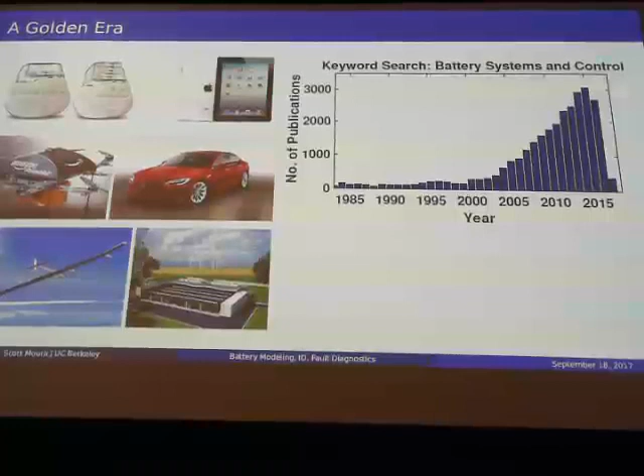And then something changed right around 2004, where there was the first paper that described how to do state estimation for batteries, specifically using extended Kalman filters. Actually, it was a triplet of papers by Greg Plett out of the University of Colorado. And ever since he started that, this field has absolutely exploded. And you can see that from the data. Of course, the numbers aren't fully in from these last years, which is why you see that dip. It's expected that it'll continue to rise. So it's a rapidly growing field.

Now, of particular interest in managing this particular system are failures. So this is something that we definitely want to understand well, and we would like to mitigate against. So one of the famous examples is the Boeing 787 Dreamliner. You're all probably familiar with the fact that a number of those planes were grounded due to battery fires that emerged. Actually, one of our PhD students who has now graduated worked at Boeing during that period.

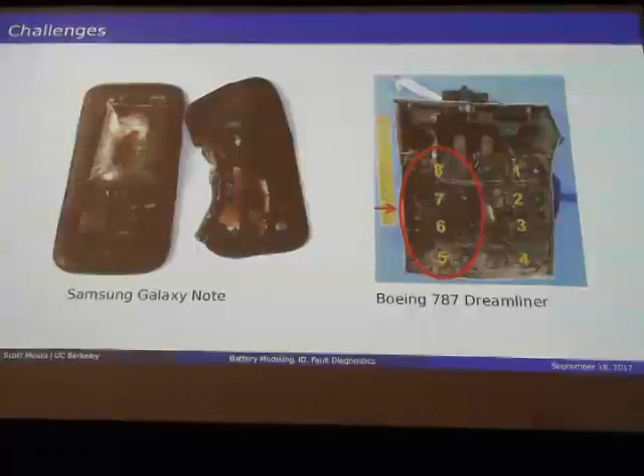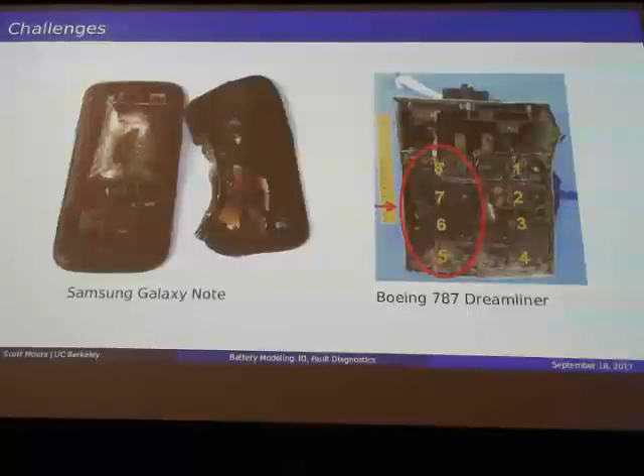And if you flew in an airplane in calendar year 2016, then I'm sure you've heard the fact that you cannot have a Samsung Galaxy Note in your pocket or on board. So it turns out that a lot of these disasters could have been mitigated with some sort of form of fault diagnostics. And as it turns out, what was used in these industries was extraordinarily primitive. So we're interested in how could we build a science in mitigating these sorts of disasters in a battery context.

Okay, so let me first highlight just the general battery problem. So I'm just going to give some background on battery management systems and batteries in general. So we want them to be cheap. We want them to have high energy and power density. We want to charge them fast, and we want them to live a long time. The reality is that they're way more expensive than we'd like. They're conservatively designed and operated because we don't fully understand how they work. And they die quicker than we'd like.

So here's some motivating facts around batteries as energy storage systems. So if you think about batteries used for electrified transportation, the cost of batteries has been increasingly coming down. So in 2010, it was something like $1,000 per kilowatt hour. Today, the last numbers I heard were dipping below $200 per kilowatt hour, maybe down to $150, depending on what context you're talking about.

It turns out that if you're interested in electrifying transportation, the magic number to get at is $125 per kilowatt hour. This is the number for which the battery and the electric motors are on economic parity with an internal combustion engine, the IC engine. So at that point, economically, it doesn't make sense to combust fuels for transportation.

The problem with batteries, among many, is that because we don't fully understand how they operate, we're conservative with how we use them. We may use, in practical applications, only 50 to 80% of their true available capacity. Another related aspect is, of course, this limits range. It causes range anxiety in the context of electrified vehicles. And then there's lifetime risks caused by fast charging, which could lead to things like the fires that we saw on the previous slide.

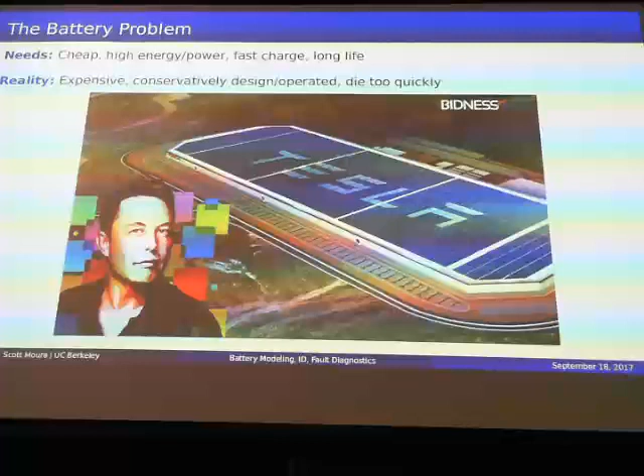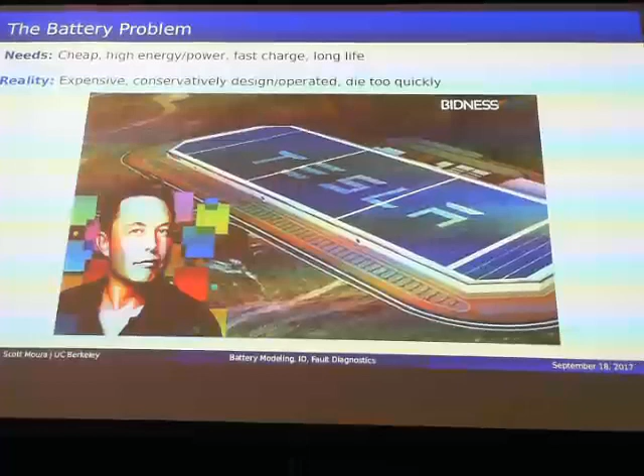Now, part of that comes from manufacturing, right? As we grow the supply chains in this, we can decrease costs. So, for example, you have this famous individual who is creating the largest manufacturing plant in the U.S. by square footage, and that'll certainly help to bring manufacturing to bear on this problem. But there's a lot more we can do in terms of science and engineering.

So I like to say that there's really two solutions to helping achieve these goals. One is to design better batteries, and one is to make current batteries better. Right? So a little play on words. What I mean by that is designing a better battery is really a question of material science and chemistry. Finding that next new chemistry that has greater energy storage density, greater power density, so on and so forth. Incredibly important work. We are not in competition with that. In fact, we support it and enable it.

But the other side of it, which is often not given as much credit, I think, is making current and future batteries better, which is really a question of the automation, the controls. How do we ensure that we can maximize the performance and safety of these devices? So that's the area we work on.

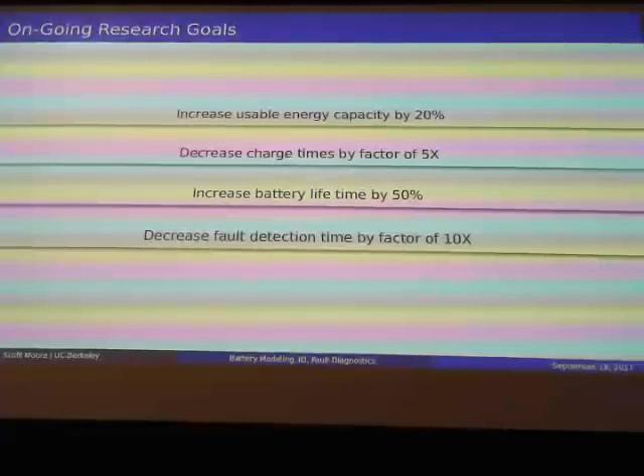And the ongoing research goals in our lab are the following. So, I tell my students they can't graduate until they hit these metrics. Okay. So things like increase usable energy capacity by 20%, decrease charge times by a factor of 5, increase battery lifetime by 50%, and decrease fault detection time by a factor of 10. So I'll eventually, in the last part of my talk, get to this last point of how we're able to accomplish that. Okay, so first let me give some background on batteries.

And some fundamentals of electrochemistry, so we can understand this electrochemical process. So, history. Let me bring you to the 18th century and the north of Italy, where we find Luigi Galvani. Luigi Galvani is a physicist and a biologist, and he did this now famous experiment where he took a dead frog, connected it, and found that the moment when he connected these two frog legs to these two basically alligator clips, the frog would jump to life.

So at that time, he found this incredibly interesting. Why was it jumping to life when he connected the frog legs to this metal? So he theorized that there was something that he called animal electricity. There was some internal energy source in this deceased animal, right? And that it would come to life when he connected the metal to it. And so, like academics and also like Italians, they like to feud with each other as they sort of debate on ideas.

He eventually presents this idea in front of Alessandro Volta, who sees this and says, I don't think it has anything to do with the animal physiology. I think it actually has to do with the fact that he's connecting two dissimilar metals in a particular way. So Alessandro Volta, to test his idea, comes up with what is known as a voltaic pile, where he takes zinc and copper, and between them he puts this electrical insulator, but it allows ions to pass through it. And voila, he created the first battery. He was able to measure voltage across these two metals.

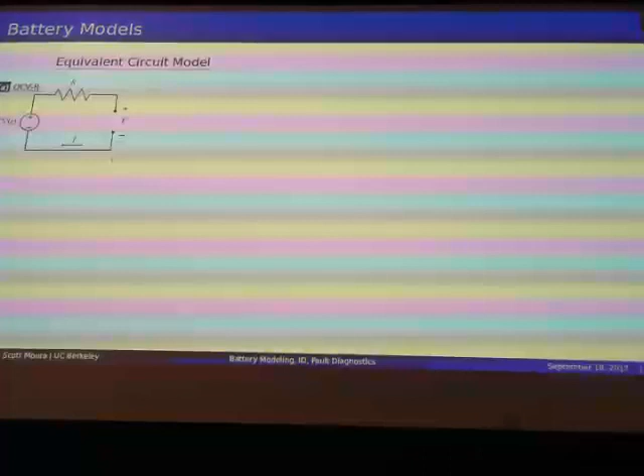Now, if you crack open those batteries, please don't do it right now, we're going to create a mess. No, you can play with them, just don't break them open. Right? They are not composed of resistors and voltage sources. They are electrochemical systems. Nonetheless, the people who do battery management systems think about them in this way, and you can get progressively more complex circuits that kind of incorporate more of the dynamical behavior.

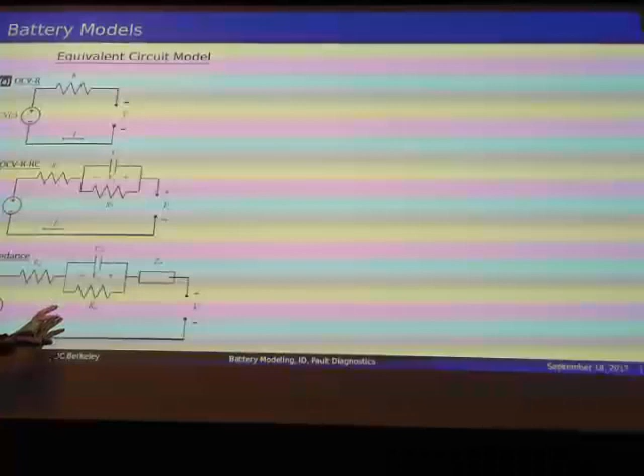Frankly, I think the reason that the industry is attracted to this is because the engineers that are responsible for making these battery management systems are electrical engineers, and they're comfortable with thinking about things as circuits, right? And less so thinking about them as electrochemical systems. Those people are designing the materials, not the battery management systems. So here's where our lab comes in and says, no, because we're really concerned about getting high performance and safety, we want to explicitly model the electrochemical, thermal, mechanical phenomena that occur inside these batteries.

So let me walk through roughly how a battery works. Okay, if I borrow one of those? Sure. So if you take this cell and you take a pipe cutter, for example, please do this in an argon glove box, and cut this open, then what you'll find is that it's actually composed of these sheets that are all wound up in what is commonly referred to as a jelly roll.

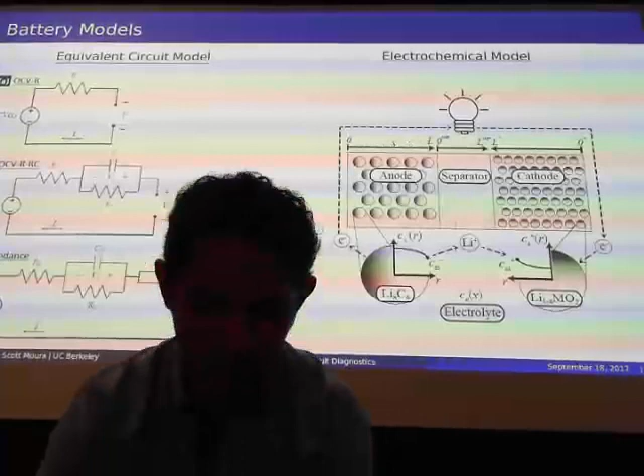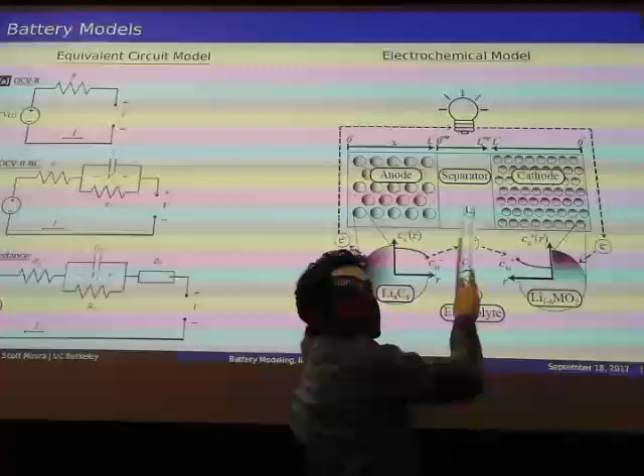And then they put it in this aluminum can here. Okay? Now, 3 of these sheets are respectively the anode, separator, and cathode. So the drawing here is a cross-section through these 3 sheets. Right? So the anode and the cathode are essentially two metals that are dissimilar. And they're dissimilar in a very specific way.

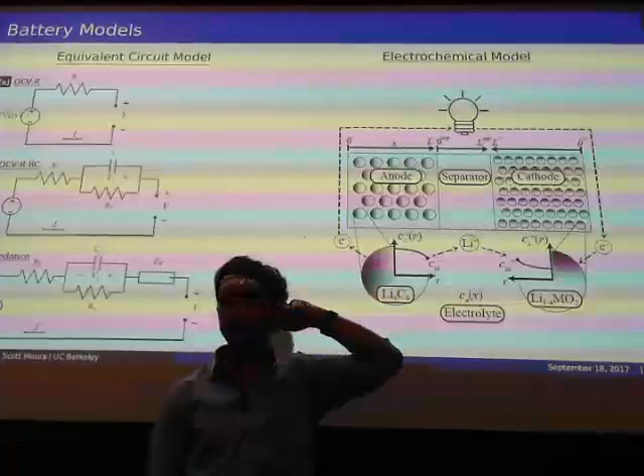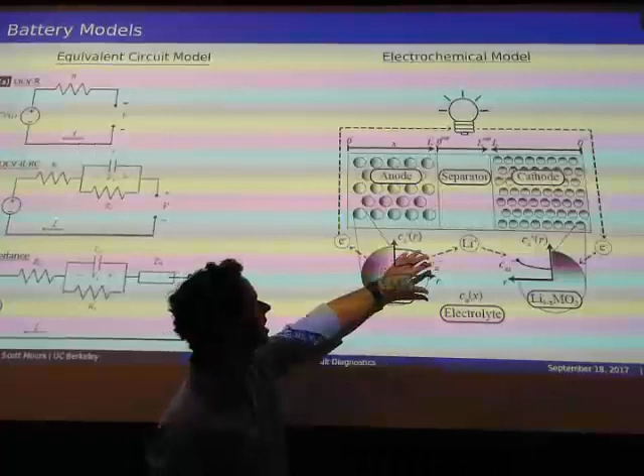They're dissimilar such that as lithium ions flow from the anode to the cathode, there's a release of Gibbs free energy. And specifically, when the battery is fully charged, lithium will be diffused in the interior of these particles that make up the structure of the anode material. And when you discharge the battery, the lithium ion will diffuse from the interior of these particles to the surface, undergo an electrochemical reaction where it splits from Li to Li+ and an electron.

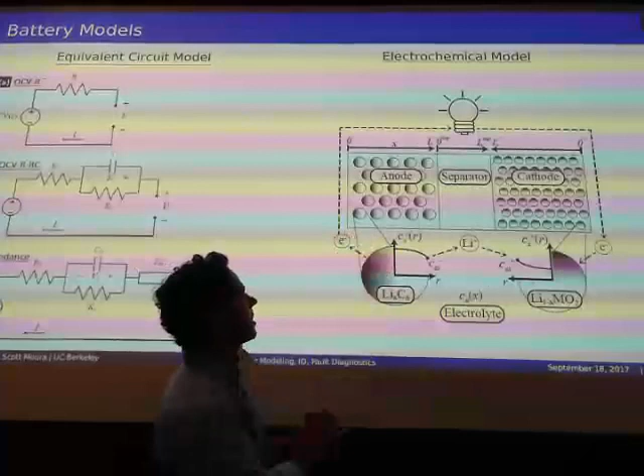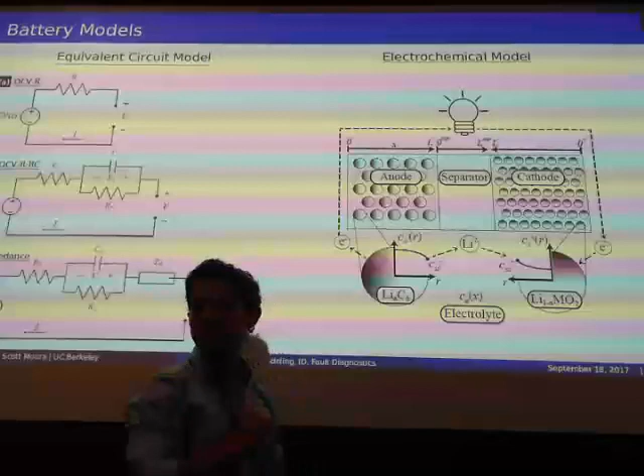Very simple. The lithium ion is now in this electrolyte, which you can think of as like a soup, a liquid, if you wish. And it transports from the anode through the separator to the cathode. Because the separator is electrically insulating, the electron is not allowed to pass with it. It is forced to go through this external circuit to power your device, drawn schematically by that light bulb.

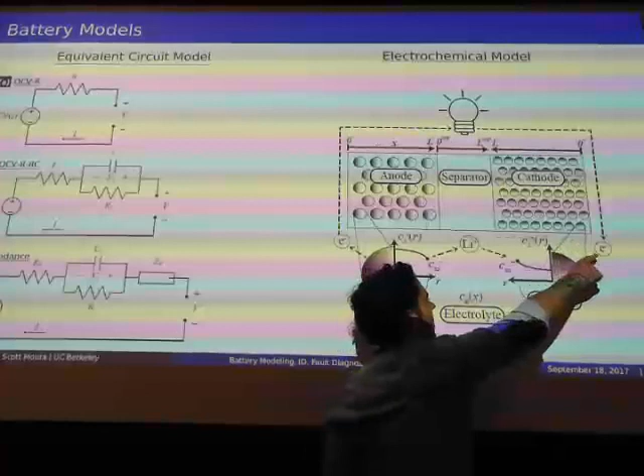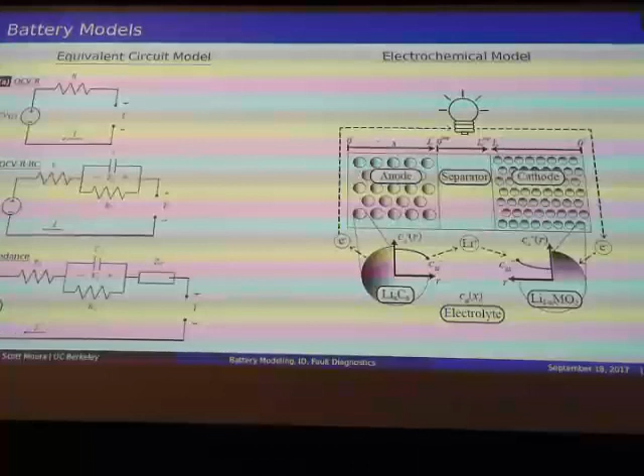It meets back up with the lithium ion here, undergoes the reverse electrochemical reaction, and diffuses into the interior of this particle. That is the basic phenomena that occurs in a battery. So we would like to track that behavior amongst other things. Now, why do we care? We care because we want to move from the paradigm on the left to the paradigm on the right.

Namely, the way we think and operate batteries right now is simply putting limits on what we can measure. So I can measure electrical current, I can measure voltage, maybe I can measure temperature on the cell. I'm going to put upper and lower limits on those, and that's my operating envelope. But in reality, if I actually understand some of the internal variables, which I can't directly place the sensor on, those things relate more to the fundamental limits of the battery.

That's one case. So really it's about, if I can understand what's happening internally, I can have higher performance and guaranteed safety. That's the point. So then the game is, how do I understand what's going on inside? So for that, I need mathematical models. Now, if I have good mathematical models, then I can come up with what we call an electrochemical controller. So this is automation of my battery cell.

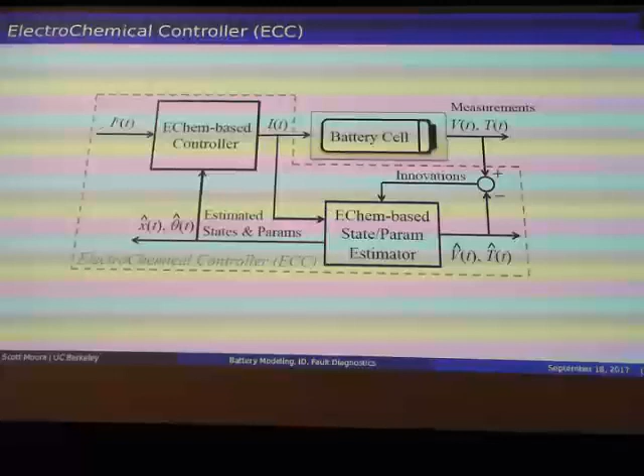And this mathematical model that I'm going to present was actually first developed here at UC Berkeley by John Newman, who is still a professor in chemical engineering. I guess he's a professor at the graduate school, as they say.

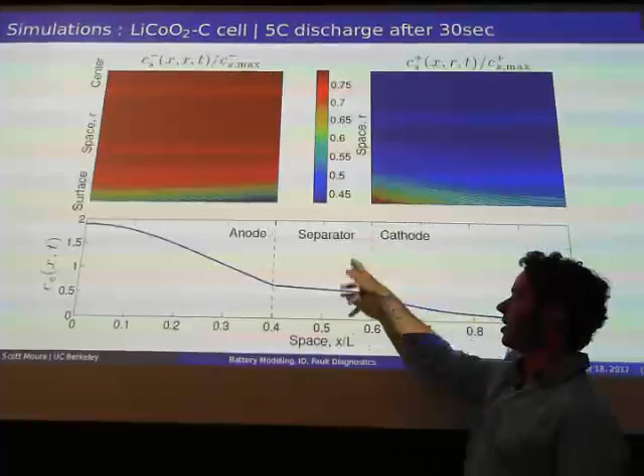So I've arranged this figure so the anode is on your left and the cathode is on your right. The separator is in the middle. On the top, we have the concentration of lithium in the solid phase, and on the bottom, we have the concentration of lithium in the electrolyte phase. So here's what's going on. On the top, we have two dimensions. We have this x dimension, which is how lithium varies along the thickness of these sheets. And then we have the concentration along this radial dimension r. That's the concentration of lithium as it goes along the radial dimension of these spherical particles.

Okay. So what you can see here is that there's higher concentration in the center and then lower concentration at the surface as lithium leaves these particles, and then it enters into the electrolyte, undergoes diffusion and transport to get to the cathode here. And then you can see here that there's a higher concentration at the surface, particularly at the separator cathode interface, and then it gets lower as you go towards the center there.

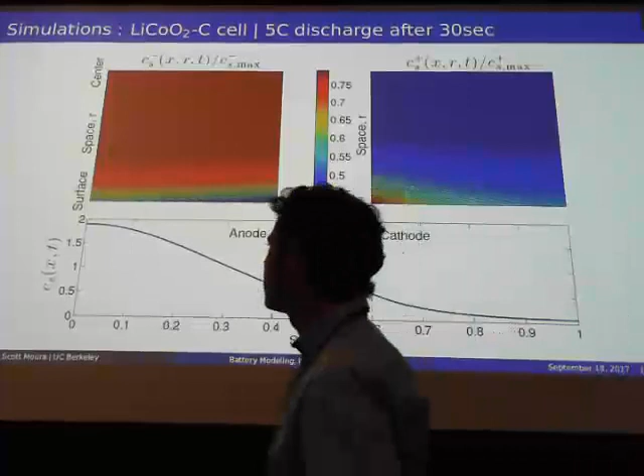Okay, so that's the mathematical model. So far this is all kind of theoretical. We would like to match our mathematical model to the batteries that are being passed around here. So this is the model identification problem. So here's the objective. I would like to identify the parameters of my mathematical model from experiments. So specifically, given measurements of electric current, voltage, and temperature, I would like to identify uncertain or unknown parameters.

Now there's two main challenges here. The first is, how would I design my experiments? How do I excite my process so I can easily identify these parameters? Very interesting question. It's an optimal experimental design problem. The second question, and probably the slightly easier one, is once I've collected that data, then how do I optimally fit my parameters to that data? Okay. So this is what I want to discuss with you next.

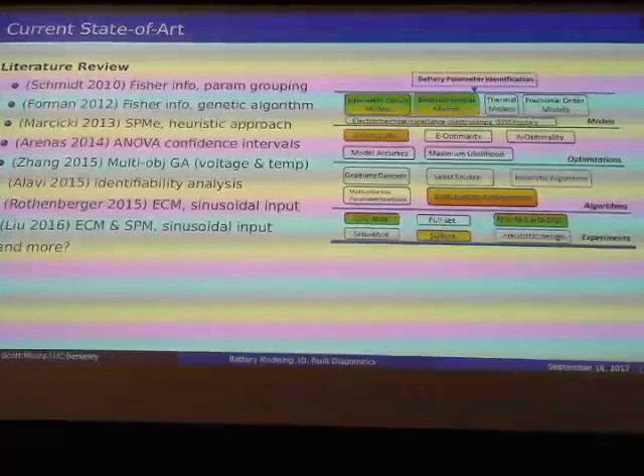I imagine you guys have situations where you have a physical process and you would like to identify a model from data. So, we spent a long time reviewing the literature on this. This is the specific literature for batteries. And we spent time thinking about what are the models they use, what sort of optimization, what sort of algorithms, experiments, and so on.

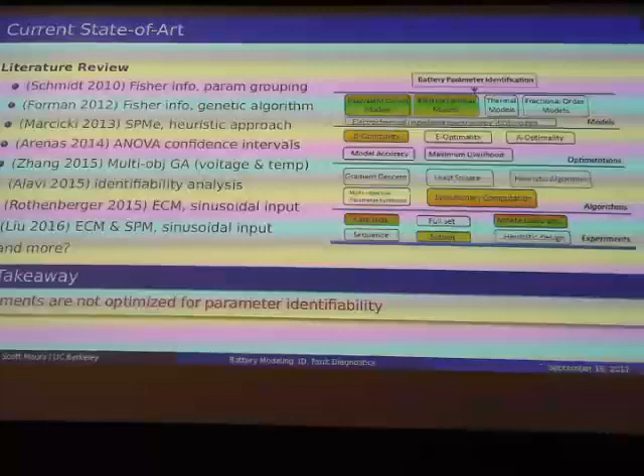Here's the key takeaway point: we found that typically experiments are not optimized for parameter identifiability. In other words, you may run some experimental profile where it's a standard experimental protocol, but you have no idea if that protocol is the best for maximizing the sensitivity to your unknown parameters. So that's the issue that we really wanted to address.

So let me give some background on what we thought was the right tool to think about this. My background is in control theory. I took 10, 15 classes in that area. So I thought about this and said, this is really an optimal control problem. Let me explain what an optimal control problem is to convince you that optimal experimental design can be thought of as an optimal control problem.

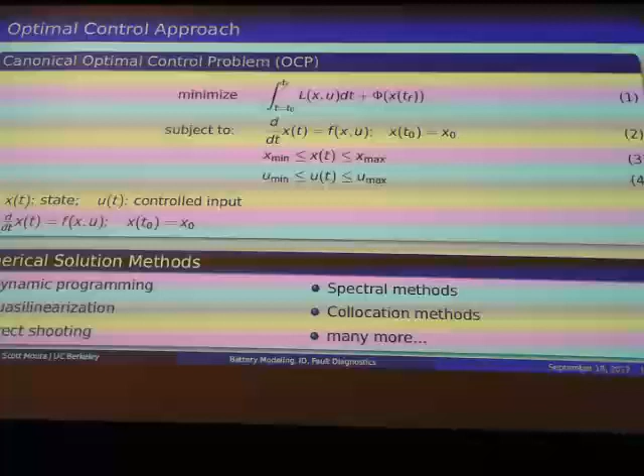So the situation is this: my objective is to optimize the input of my system. So U is the optimization variable of interest, where I would like to optimize this controlled input to minimize some objective function. In this case, I actually want to maximize sensitivity to my uncertain parameters. Now, the reason it's an optimal control problem as opposed to just a plain optimization problem is because my system is subject to dynamics, which I'm representing by this standard nonlinear ordinary differential equation.

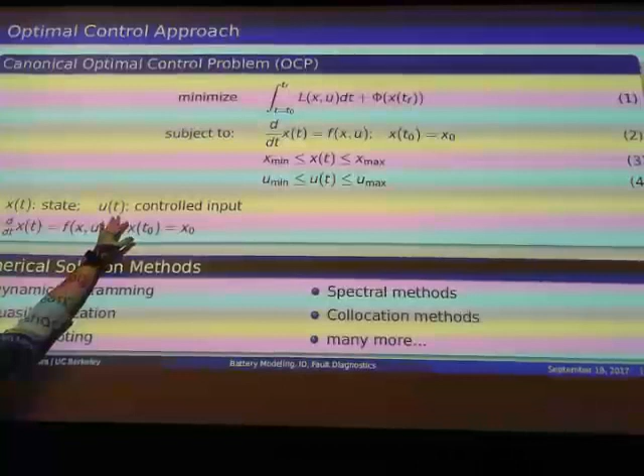And it's an optimal control problem also because my optimization variable here, U, is actually a trajectory. It's not a finite number of points. It's actually an infinite dimensional object. So that's known as an optimal control problem, used in a variety of industries: chemical, aerospace, automotive, many various industries. So we thought this was the right way to think about this problem.

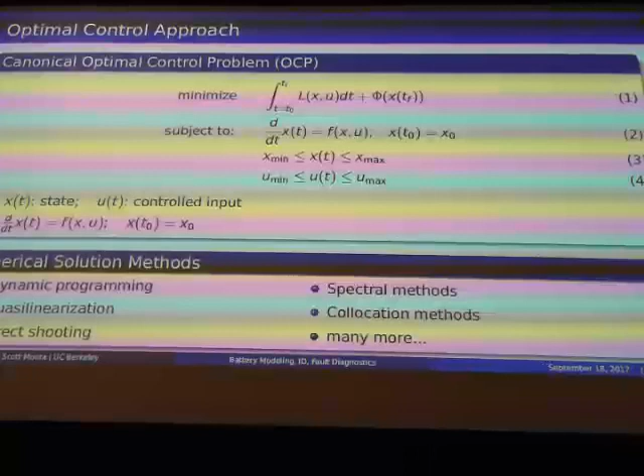So this formulation is very elegant, it's mathematical. But it turns out this optimal control problem proved to be computationally intractable. Namely, it took us 2 weeks to generate 100 seconds of optimized input signals, which is just not tractable or feasible for us.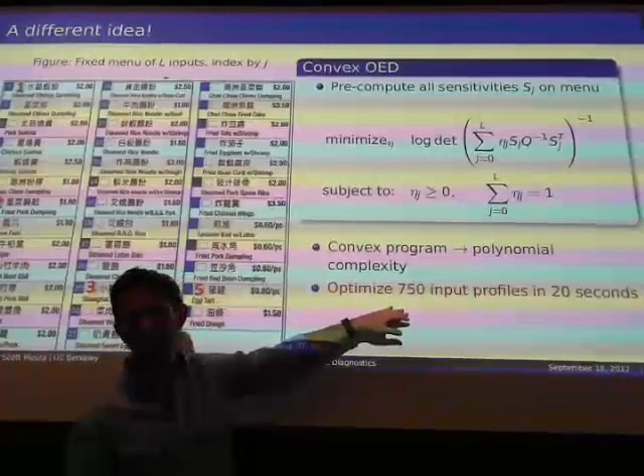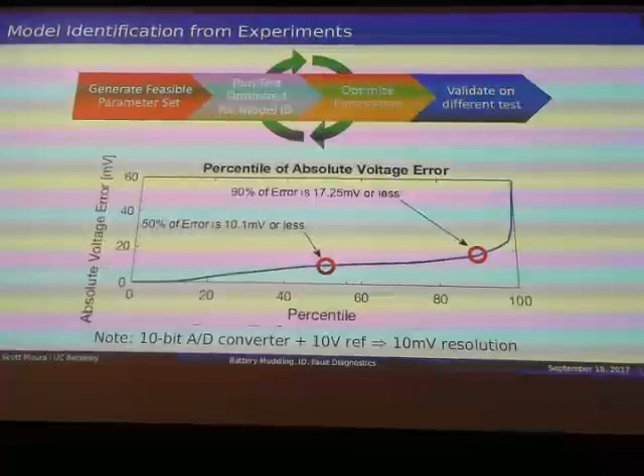So this was super enabling for us, by just completely changing our perspective. I had to get out of my control theory way of thinking, and now come back to this convex optimization way of thinking. So that was the key idea in that work. Okay, so from that, I'm going to skip all the details and say that after running those optimized tests and then optimizing the parameters, we were then able to get a well-fitting model.

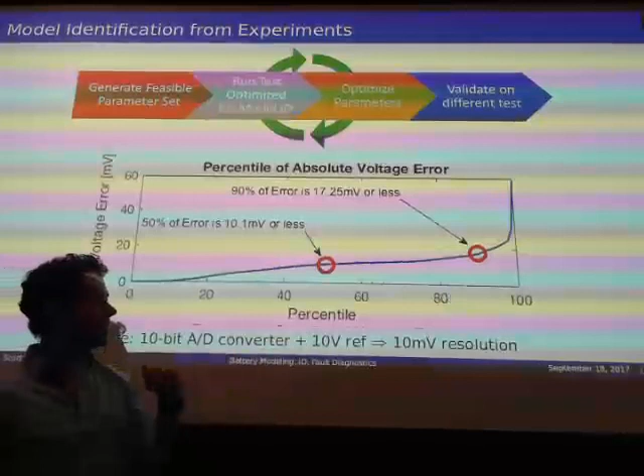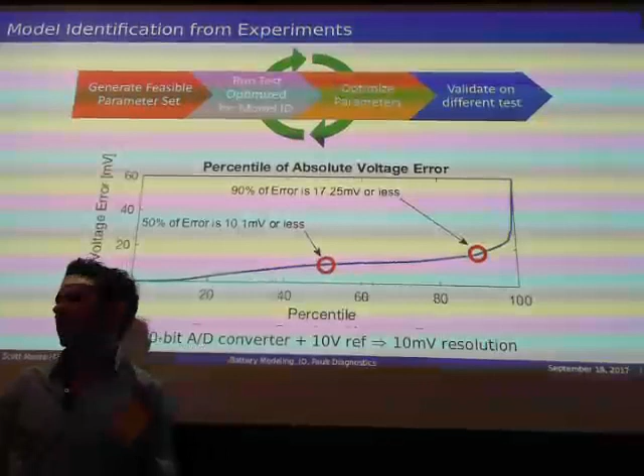So what I'm showing here is a distribution function of the absolute voltage error. So what this plot says is that 50% of the error is 10 millivolts or less. And we thought that was pretty good because if you're using a 10-bit A to D converter and a 10-volt reference voltage, then the minimum resolution on just that equipment is 10 millivolts anyway, so you can't even measure less than that. And frankly, that's modest equipment. So that's where we stopped at that point, or are continuing to work, frankly.

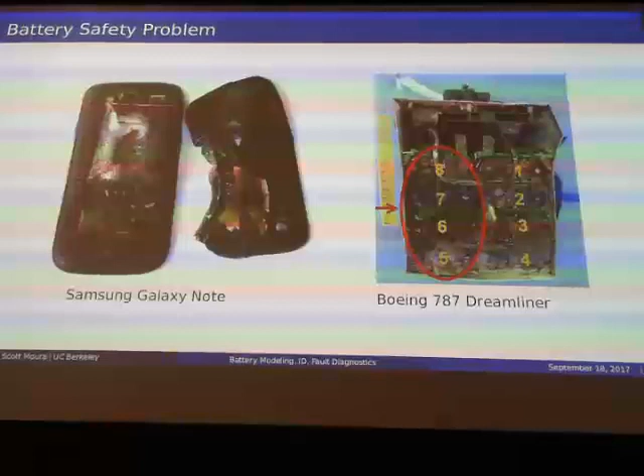So let's now talk about fault diagnostics. So let's come back to this battery safety problem. Now I want to address the issue of how do I detect and estimate when something bad happens, now that I'm armed with an electrochemical model and I know how to identify it well from data. So we created a list of various battery faults. And in the work I'm going to show you right now, we're going to focus on thermal faults. So these are things like thermal runaway, convective cooling failure, internal thermal failure, and by the way, you can download these afterwards if you want.

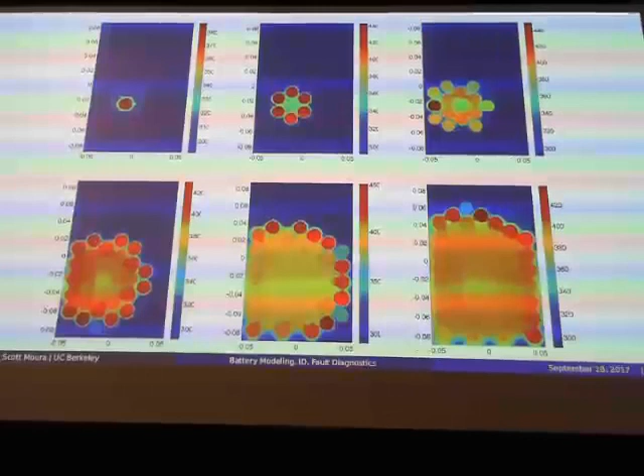Essentially what happens is when one battery has like a short circuit or something like that and it starts to generate heat, then the effect that has is it causes the electrochemical reactions to happen faster. It's your Arrhenius type of effect that you expect. When those reactions happen faster, current flows faster. You have I squared R type of heat generation, and that's the positive feedback loop. It's pretty simple to understand. So we would like to detect when this sort of thing happens before we disallow people from bringing their phone on the plane.

So here's the objective. I would like to detect a fault when it happens, and more than that, I'm going to add another objective. I don't want to just detect when the fault occurs. I would like to estimate how big it is. Okay, in some sense, estimate the fault size. There's a couple challenges here.

One challenge is that we have few measurements. Generally in process systems, we can't paint sensors over everything, right? So we can only measure a few things. And the faults may be occurring away from where our sensors are.

The other reality is that we're going to leverage a physics-based model. But as you know, all models are wrong, but they can be useful. So we have to deal with this fact that there's uncertainty in our model. So we have to deconvolve the model uncertainty from a fault. Does that make sense? We have to be able to separate nominal behavior from faulty behavior in the face of uncertainty.

Okay, so the state of the art in industry, at least for batteries, is limit checking on measurements. What I mean is, if I can put a sensor on it, I can see it, and then I'll just have max and minimum limits on those things I can check.

For example, in a battery, I might say, and maybe you've experienced this with your phone, when the temperature gets above 60 degrees Celsius, I'll just shut everything off. Does anyone experience that? Yeah, that happens to me all the time, especially when I biked to a Cal football game on a hot Saturday afternoon, and then I'm texting my friend, and then my phone shuts off. That happened recently. So anyways, we would like a better way than that.

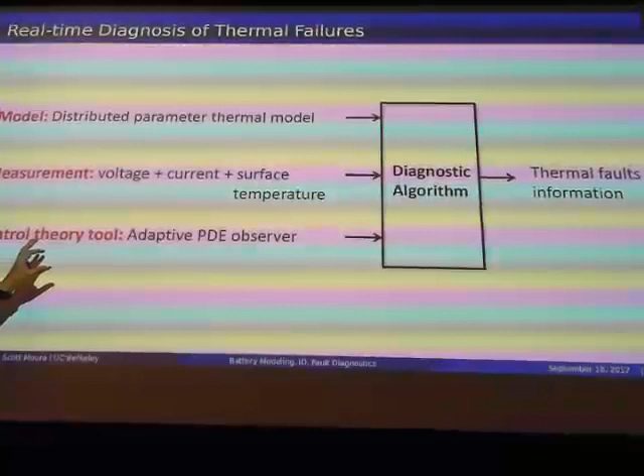We have some measurements. In this case, I assume I can measure voltage, current, and surface temperature. And then I've got some control theoretic tools that help me with the mathematics. Because I'm trained in control theory, we make a big deal about proving convergence of our algorithms.

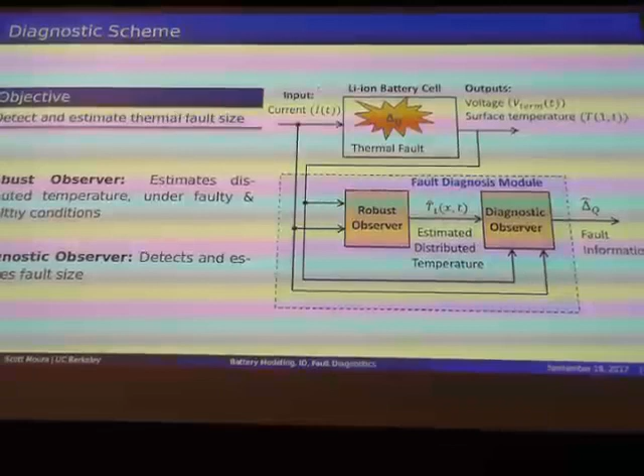Okay, now, we're going to hypothesize that a fault could occur. So, boom, now we have a fault. So delta Q represents some internal heat generation, which is some anomalous thing that could possibly occur in this battery. So I'd like to detect when this thing occurs. So the objective will be to detect and estimate the thermal fault size,

and the algorithm that we've come up with looks like this. So first on top, this box represents our lithium-ion battery cell, and then this comic book like drawing here says, boom, there's a fault. Delta Q is now creating some anomalous heat generation. But all I can measure is current, voltage and surface temperature. And the fault diagnosis module in software is here.

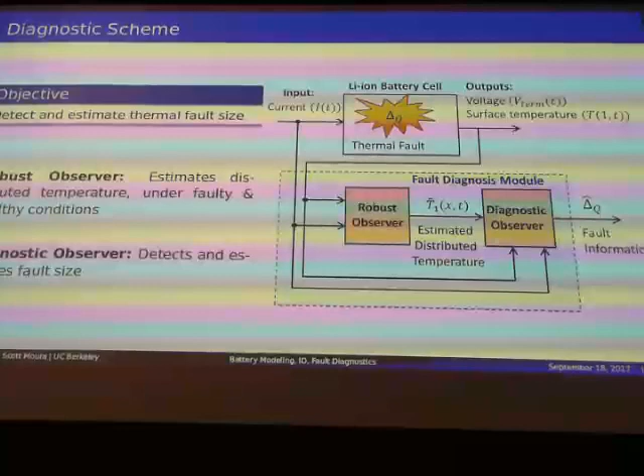So there's two pieces. There's a robust observer, which tries to estimate the internal distribution of temperature. And then from that, I have a diagnostic observer, which detects the presence of a fault. So that's how we've decomposed this. Right.

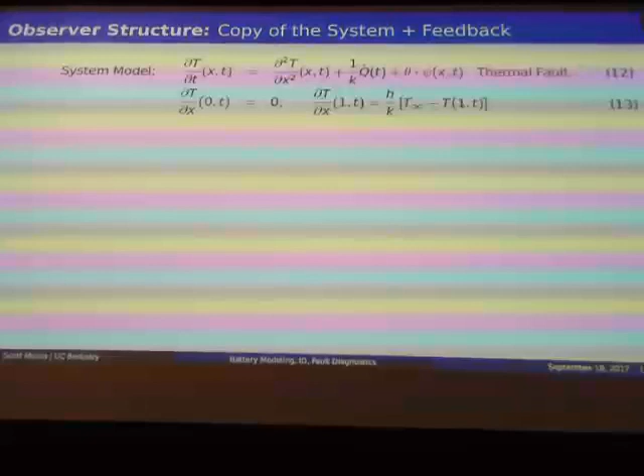So what we're going to do eventually is estimate theta. So when theta is non-zero, I've detected a fault. The quantity of that theta will be the size of my fault. Okay, that's why I'm doing it this way. All right, so that's my system model, and I'm going to hypothesize that I can model the fault this way.

The robust observer is going to be as follows. So this is something that you can learn about if you take my class CE 295, Energy Systems and Control.

We're going to design a state observer. I'm going to, in software, make a copy of my model, but then I'm going to correct it with measurements. So I'm going to take the error between my surface temperature, that's T at X equals 1, and my modeled surface temperature, which is T1 hat. I'm going to take that error, scale it by a gain, and inject that into my dynamics.

Turns out I also have to inject in a boundary condition. And if you do that correctly, then your observer will converge. The state of your observer, which has the distributed temperature, will converge to the true distributed temperature of your system. Okay? This is a lot of what control theory is concerned about. Once I've done that, I now have an estimate of the internal distribution of temperature in my battery.

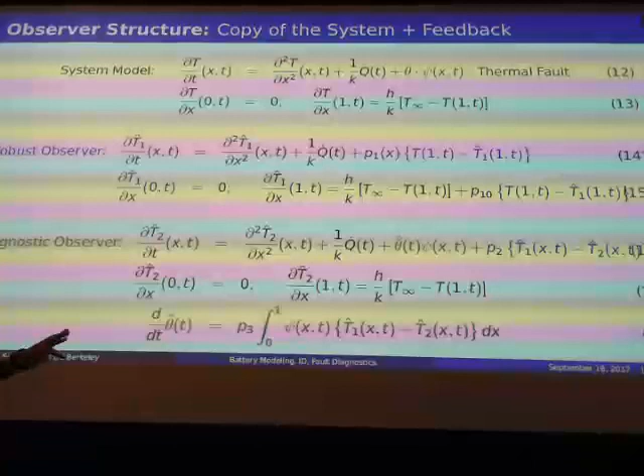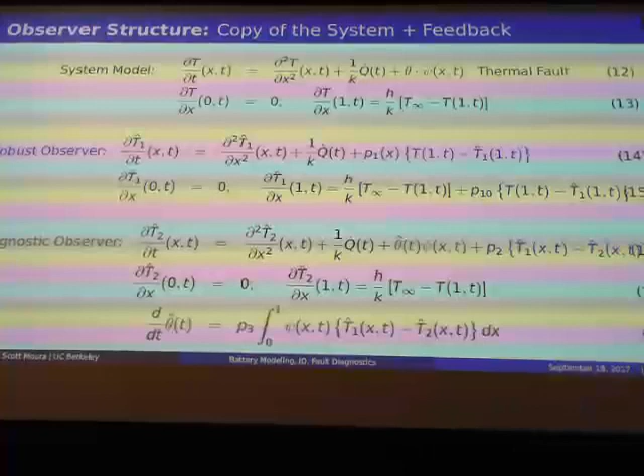Now I'm going to apply the diagnostic observer, which now adds this extra term here, where I have theta hat times psi, and I'm injecting some error here, but the other key part is I have an adaptive law that is trying to learn theta from the error. And the reason this works has to do with the mathematical proof. But the idea here is theta hat, when that's non-zero, is going to detect the fault, and then the magnitude of theta is going to detect the size.

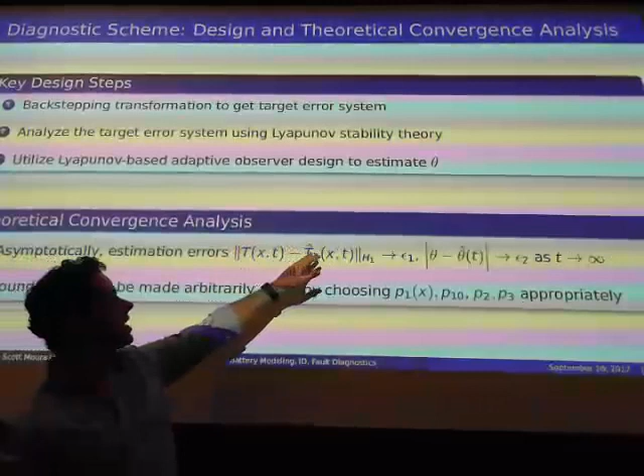So, from this, the key steps are we'll use control theory and Lyapunov stability theory to prove convergence of the system. And what this analysis tells us is that the error between the true temperature and the estimated temperature converges to some number epsilon. And also the size of the fault and our estimated size of the fault, this error converges to a different epsilon.

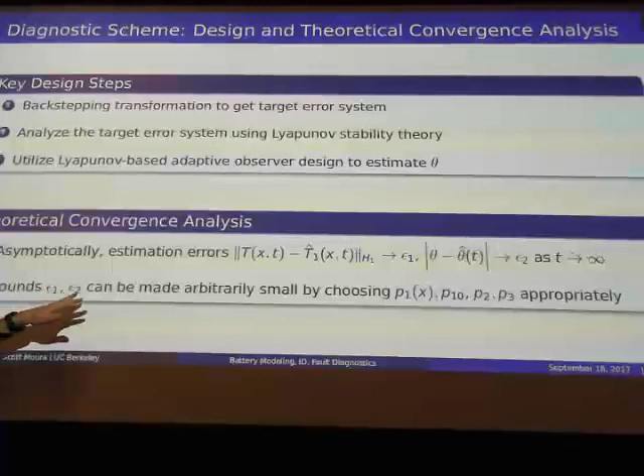And it turns out that I can make these two epsilons arbitrarily small if I pick the gains of my algorithm correctly. Okay, so those are the tuning knobs. If I pick them correctly, I can get this thing to converge. Okay, so that's the theory.

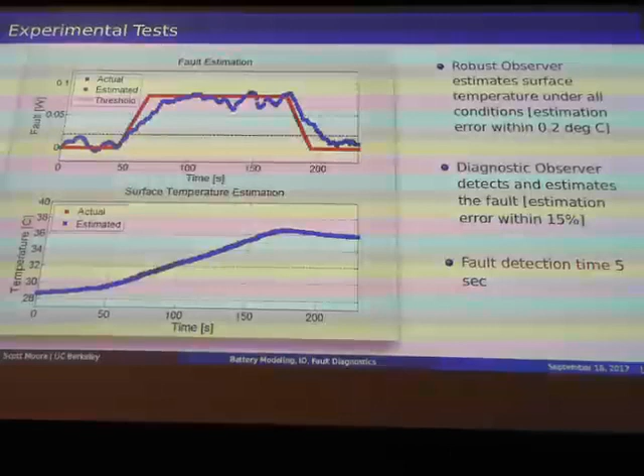And so here you can see the two cases. The nominal behavior is in red. You can see it heating up just because of charging and discharging. And then we inject the fault, that is, turn on the heat pad, and you can see the heat's rising, but it's still not 60 degrees Celsius, right? So we may not think that this is a fault yet. Okay. So from this, we ran our algorithm. I actually have a little video of it.

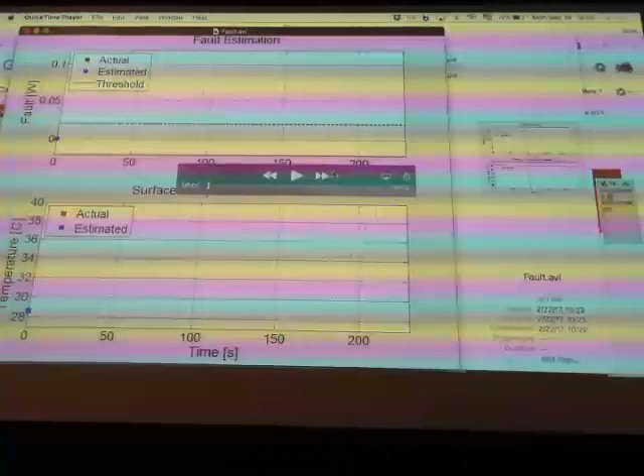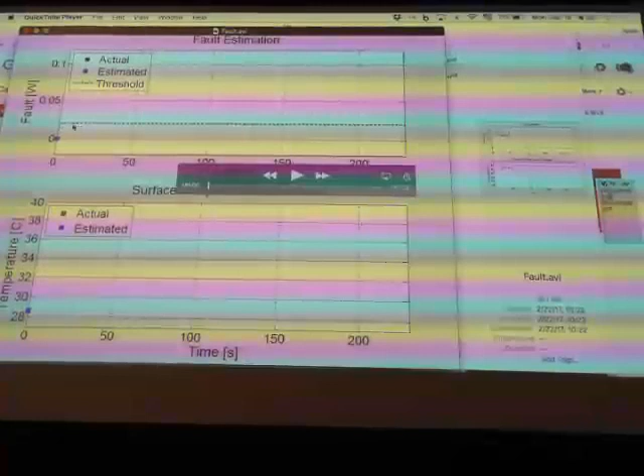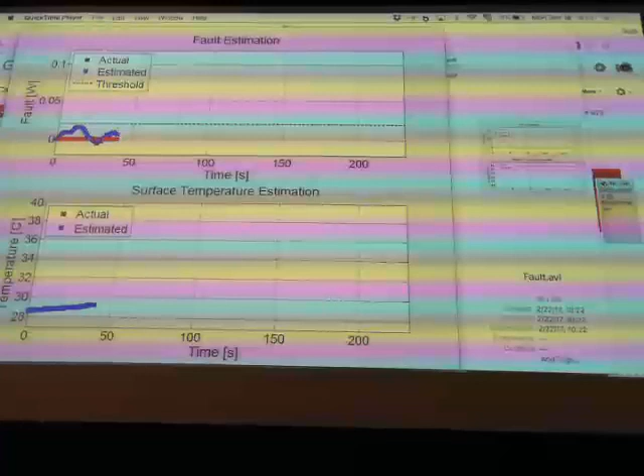Okay, so what you're seeing on the top is an estimation of the fault size, and on the bottom is the surface temperature. And the dashed black line here represents the threshold beyond which we detect a fault existing. So you can see that we run this, and what's in blue is our estimated fault size. We inject the fault, I think at 45 seconds, and you can see that our algorithm is essentially capturing that something is happening. There's some internal heat generation.

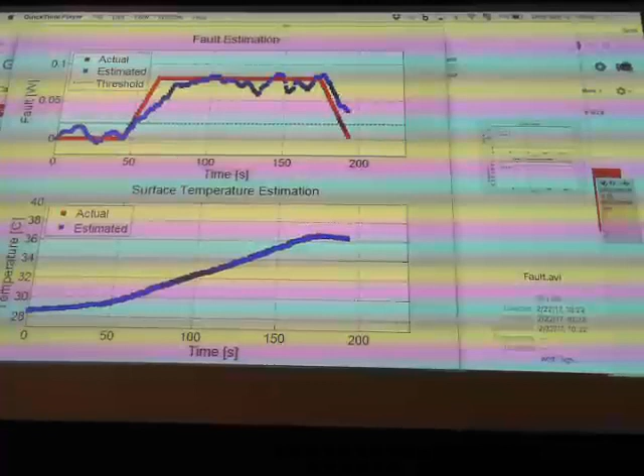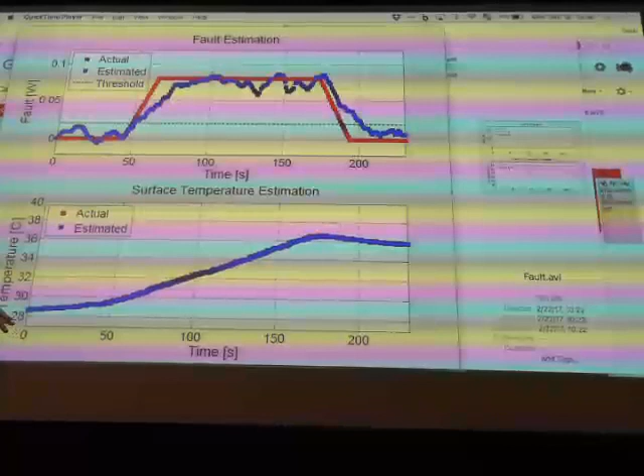Let me highlight again that the standard thing people would do is just limit check. So 60 degrees Celsius, I've detected a fault. I don't even come near that. Yet something incredibly important has happened internally, and I can detect it within seconds. All right, so that's enabling.

Let me now summarize. I gave you some background on batteries, electrochemistry, some of the fundamentals. I tried to convince you that these physics-based models, namely electrochemical-based models, can enhance monitoring performance and safety. I talked about this idea of optimal experimental design for parameter identifiability, aka the dim sum idea. I like dim sum, that's why we call it that. So anyways, then there's thermal fault diagnostics.